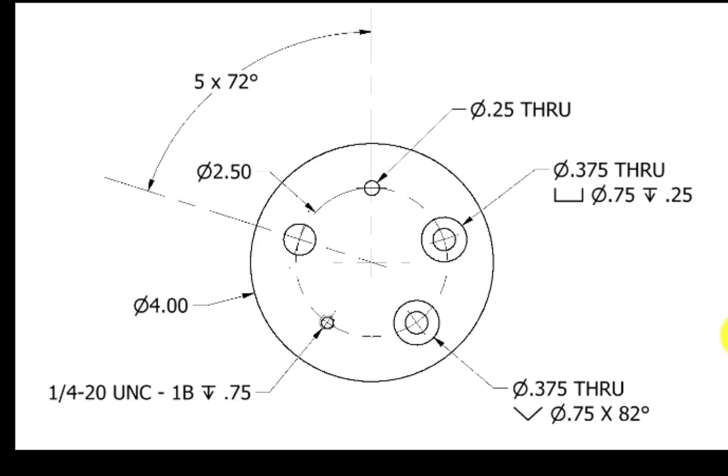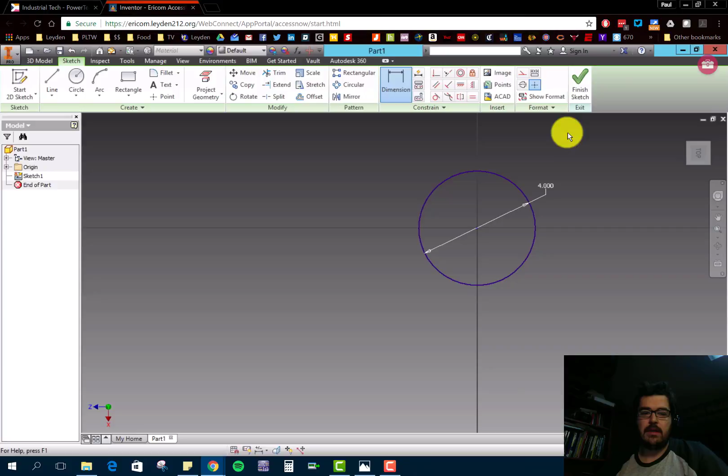So start a new part file. Starting a new part file, we'll start a sketch. Again, we're just looking to create a circle here that we can extrude out. So let's get a circle. This has a diameter of - just double check here - a diameter of 4. So we're going to type in 4 here. I'm going to hit finish sketch, but technically I hit E on my keyboard to go right into the extrude tool. And I need to extrude this a distance of 1.5. So 1.5 - oh, gotta make sure I type it in over here. 1.5.

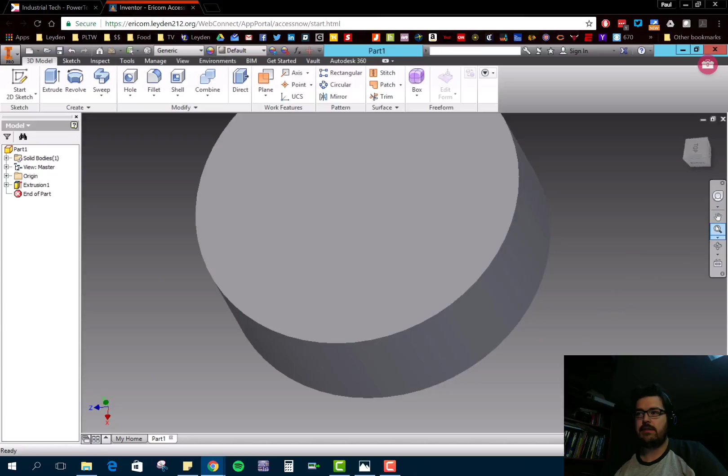All right, now that we have this in place, the instructions, if you follow along, are going to tell you to start a new sketch on this face. What we're going to do is place a point, because what we'll do later is use these points to act as the center points of putting a hole in, and we'll do that in 3D mode. So we're just placing essentially center points for these holes using the sketch, and then using a point here. So we can place points here like so.

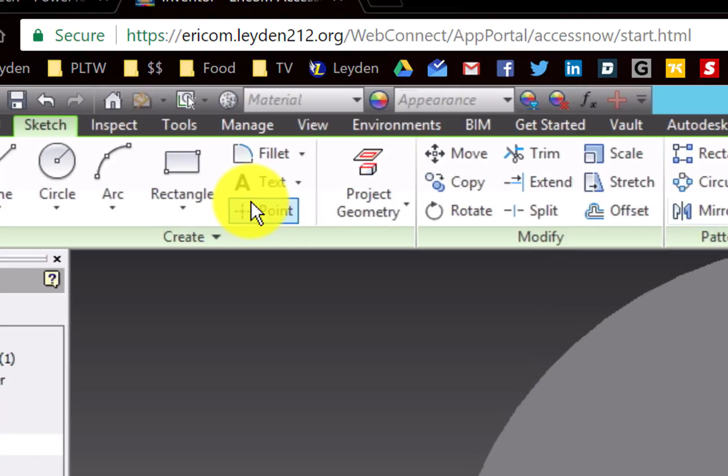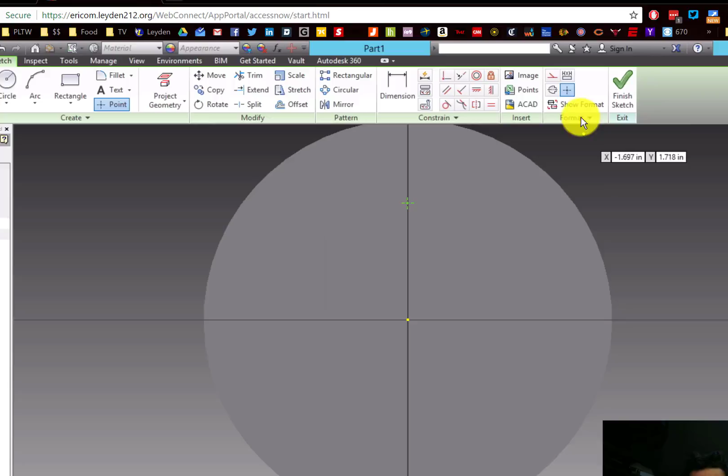Now the first thing is you want to come over here to where it says format. Before, like we changed it to a construction line, right here where it says points, we want to make sure that it's on center point. If you deselect it, it will not be on. You want to make sure it's on, so it's on center point, because if I come here and put a point down, you're going to want to see that there are those little lines with it. If I deselect this and click a spot, it's just going to put a little green dot, and that's not what we want. We want the one with the little dashes. So make sure that little box is selected.

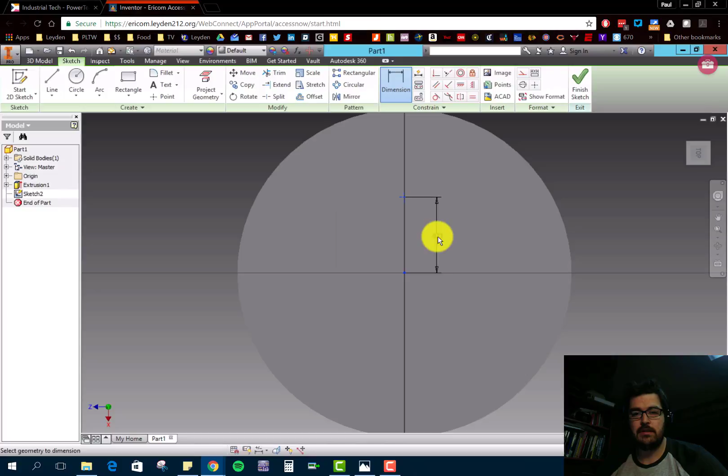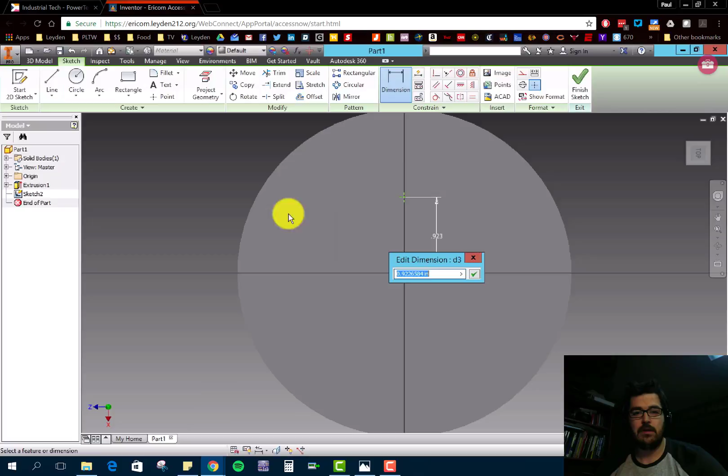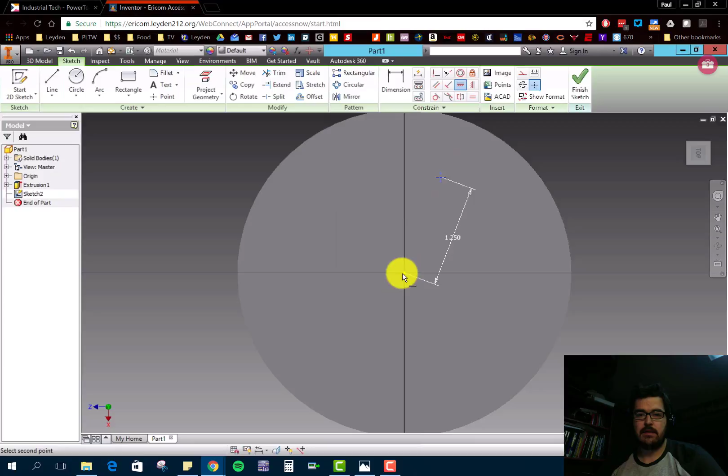Then what you're going to do is dimension it. I need to go from the center point of that point to my origin, 0, 0. That distance, if we open this up, is half of 2.5 - you see how it's on a 2.5 diameter, so we're looking for the radius here. So what's this from here to here? Well, that's half of 2.5, which is 1.25. So come here, type in 1.25, hit enter, and we're good to go. So I'm locked onto there. I could come here and drag it if I wanted to. If you placed it over here and you want to make sure it's locked onto one of these axes, use your constraint tool to then lock it into place, like so. Once it's there, it goes blue, it's fully constrained.

Once we have that dimensioned, what we're going to do now is use the circular pattern to make 5 of them, and they're all going to be equal distance from the center. So if I go to circular pattern here, still in sketch mode, the geometry I need to rotate is this, that's the point. And then the axis, I could grab either a circular edge or just the center point.

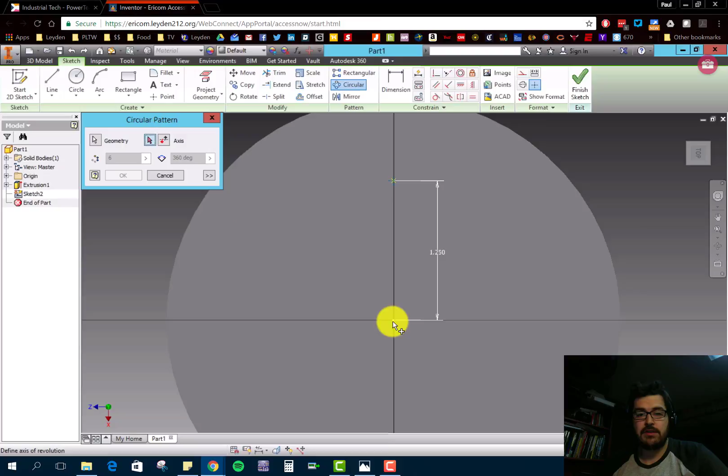So I'll grab the origin here, 0,0. And you can see that these points are aligning now. It says right now for 6, but I want to change that to 5. We'll hit OK, and now I have those 5 points on that circle there.

Now I can go ahead and finish sketch. With finish sketch selected, we can then go in and place a hole at each one of these points. In the 3D Model, you'll see here that one of the tools right here is hole.

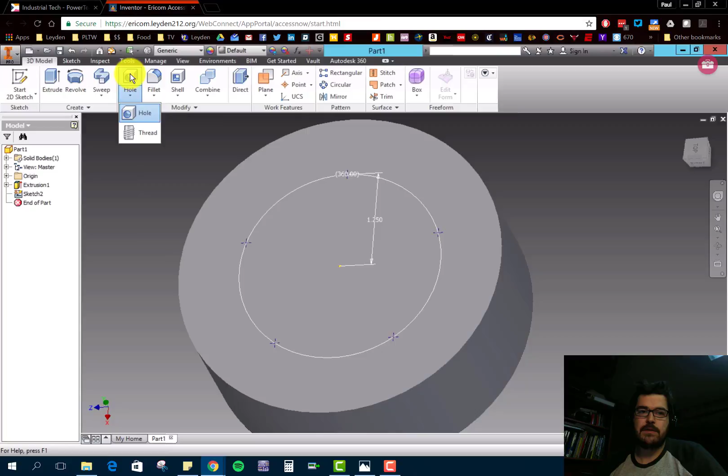If you select on hole, grab it. Notice it automatically grabbed all 5 of them. So if you don't want that to occur, hold the shift key and select any of these holes, it will deselect them. Hold shift and it will start to deselect them.

Alright, so for right now we want to just start with one of them. Looking at these holes, let's start with this guy right here. This is saying the diameter is 0.25 and it's a through hole.

So that one's easy. From the sketch, I grabbed a hole. It automatically selected that point as the center of the hole. These are where we can determine what type of hole to put in. So this first one is just a regular through hole.

The next one is a counter bore. This one is also, I believe, a counter bore. And then this is a counter sink. So it gives you different ones to work with.

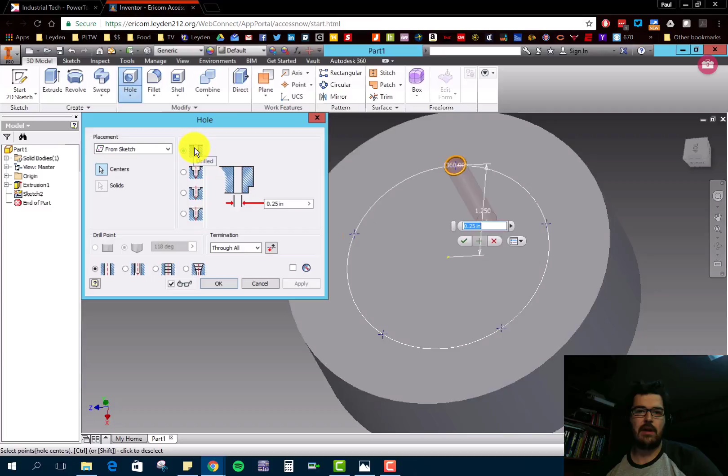But this one we just want a drilled regular hole, and this is 0.25 inches diameter. This is where we can determine how far we want to go. For right now, we want to go through all. But if we wanted to go a specific distance, we could click on this and tell it how far to drill through. So in this case, we'll go with through all and hit OK.

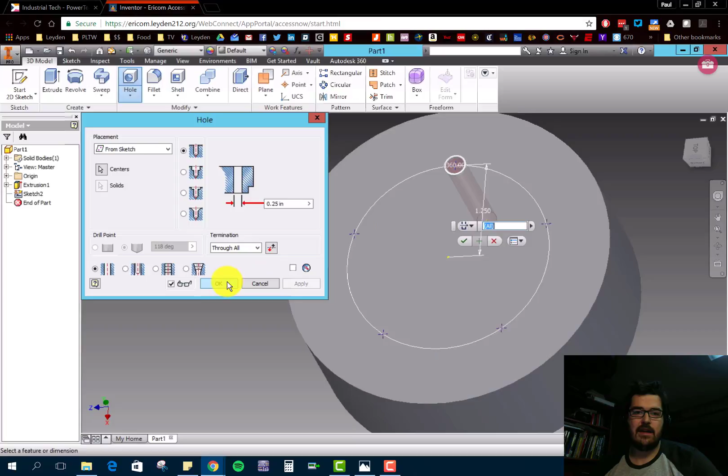Now once we put that hole in, you may notice that the sketch is now gone. So if I were to come in here and try to create another hole, the points are no longer there for me to select.

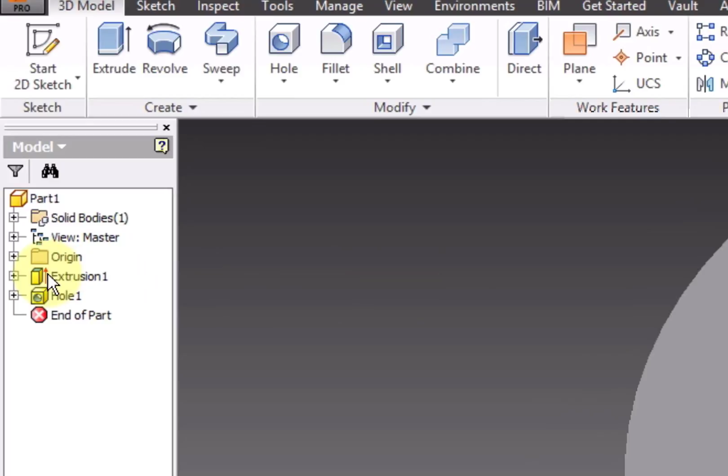So one thing you can do is what's called share a sketch. Once you do something to a sketch, it gets locked in to whatever feature you put onto it. So like the extrusion was that initial sketch of that circle diameter, and like this hole, the sketch that we worked off of was this one here.

Now, if you right click that sketch and hit share sketch, what that will do now is allow that sketch to go outside of this and be reused multiple times. So that's what we want here. If you right click that sketch, open it up, right click it and hit share sketch, it now made it visible throughout the entire part, so now we could reuse it multiple times.

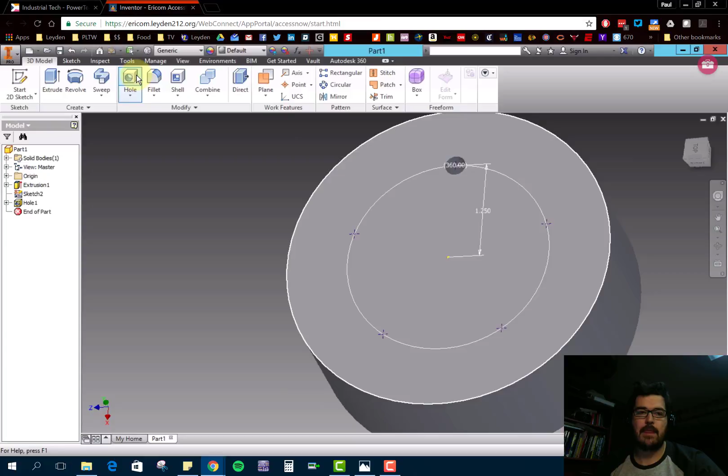So the next hole we'll do, I grab the hole command. Again, it grabbed those 4 points. I'm going to have to hold the shift key to deselect the ones I don't want, which is okay.

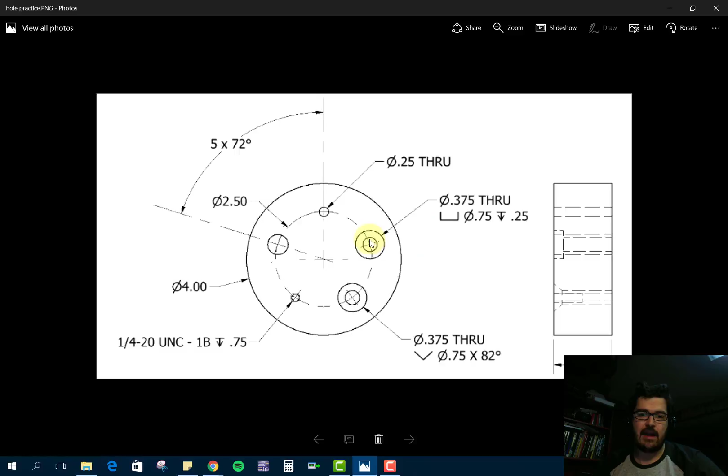All right, so this one here, the next hole we're working with, this is a counter bore, which means that there's going to be kind of 2 dimensions to it. First off, we have a 0.375 through, so that's the inner diameter. The outer diameter is 0.75, and that goes down a depth of 0.25 inches.

So let's bring it up here. What we got is a counter bore, so we're going to want to select the counter bore hole here. The outside diameter of that one was 0.75. The inside diameter was 0.375.

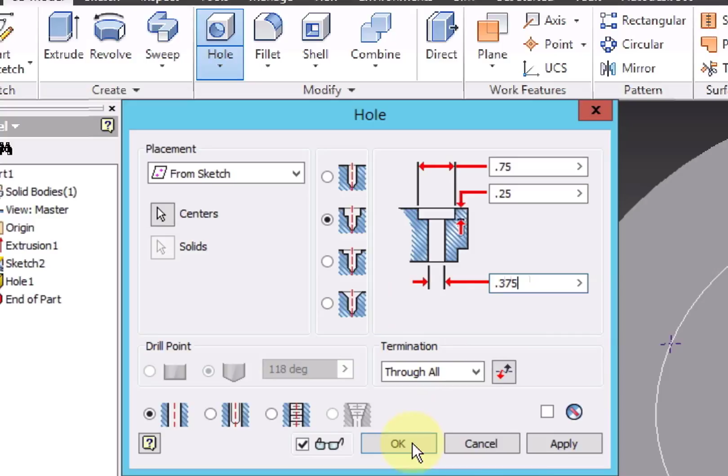The depth of that cut was 0.25, and the through hole right here is 0.375. Gotta look a little closer next time, Mr. Zurek. Nice job, but again, notice this is 0.75. The depth of that hole is 0.25, and the through hole is 0.375. We'll hit apply, and we're good to go.

Since the sketch is shared, when I hit apply it worked on that hole, and then we can move right into the next one. So this is being efficient here. I'm going to hold shift and deselect some of these, and we'll start with the next one.

The next one is a counter sink. This is 0.375 through, so same diameter distance through. But we have a counter sink cut here, an angled cut, that has an outside diameter of 0.75 and an angle of 82 degrees. So bringing it up.

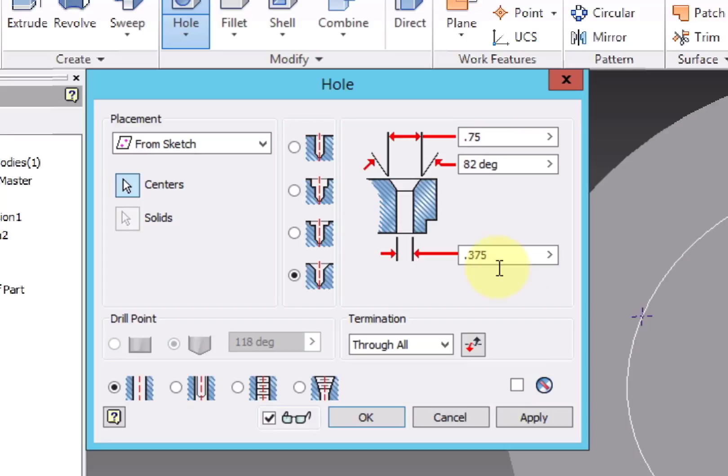This is a counter sink now, so this has an angled cut to it. Our outside diameter is 0.75. The angle, by default, 82 degrees. And then the through diameter is 0.375. Hit apply. Nice, moving along.

The next one we're looking at is a threaded hole, or what's called a tapped hole. This is going to have threading inside of it, so something you could just screw into it essentially. This is going to give us the thread information in terms of how it should be threaded, and this 0.75 is giving us how far it's going to go down the threading in this sense.

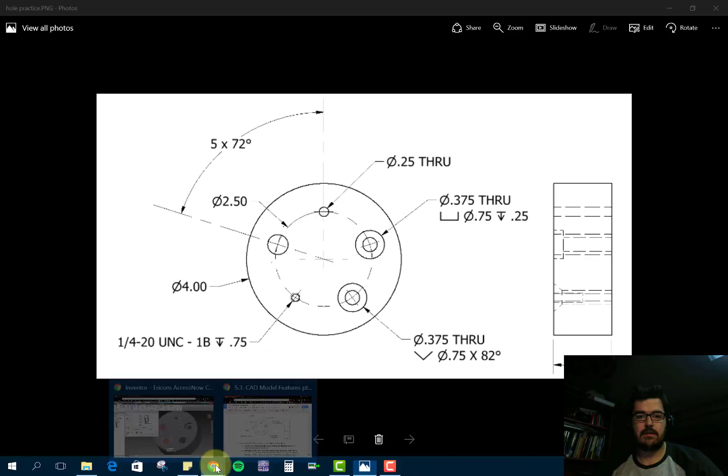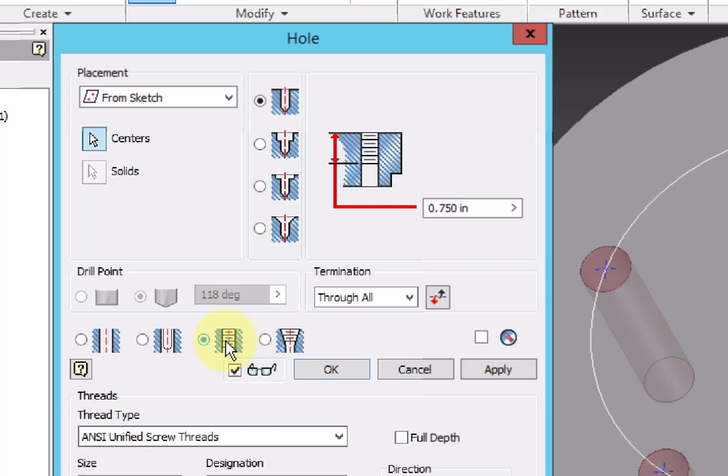Okay, let's go ahead and open this up. Our next one, since it's just got an overall diameter of a cut and it's not any countersink or counterbore, we're going to do a drilled hole. Now, down here is where we determine what kind of hole it is. This button right here is called a tapped hole, meaning they're going to thread it. So when I select on that, it's going to bring up all of the different sizes we can work with.

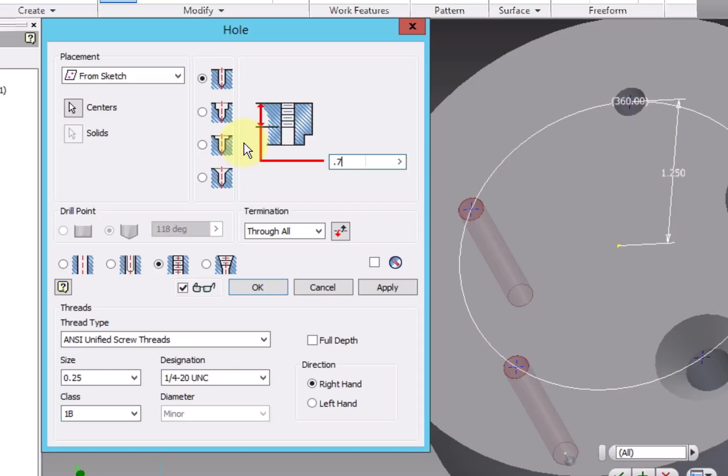So this is a 1/4 inch, so 0.25. We've got a 0.25 1/4 inch 20 UNC. This is where we could determine it, and by default it came up 20 UNC. The specific class for it is a 1B, so I can choose 1B. And in this case, like we said, the depth of the drill for this, or the tapped on it, is going to be 0.75. That's the last number there. Okay, and then I hit apply.

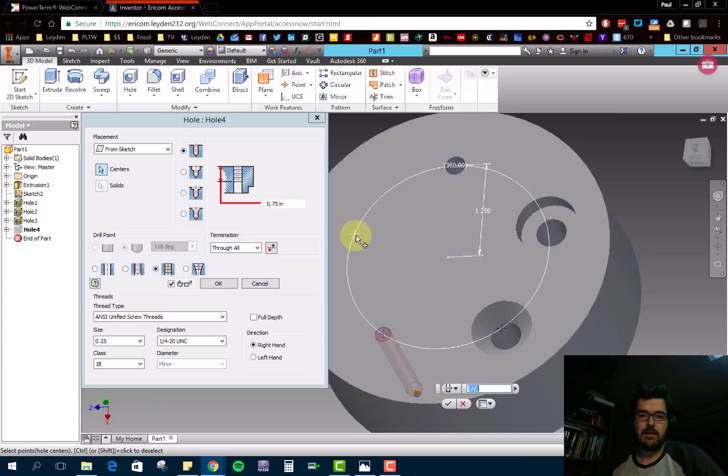Oh, now notice I made a mistake. I forgot to deselect this guy. So I'm going to hit cancel to close my hole tool. I'm going to double click the hole one that I worked on before, and then I can shift and deselect that one and go back and hit OK and clean that up. So again, you can always make re-edits to whatever tool you use.

All right, and so this last hole here they want you to work with is a clearance hole. And in the instructions, if I drag them over here, this is a clearance hole. And what this is going to allow us to do is if we wanted to throw like a bolt through it, so a bolt and a nut, we want to make sure that it's going to be snug around the bolt, but we also want to make sure that it's a little bit larger than the bolt so that we can easily put them in as we're installing whatever it is. So this is what's called a clearance hole. Here's your information for what you need to type in for this, but where you get the clearance hole is from right here.

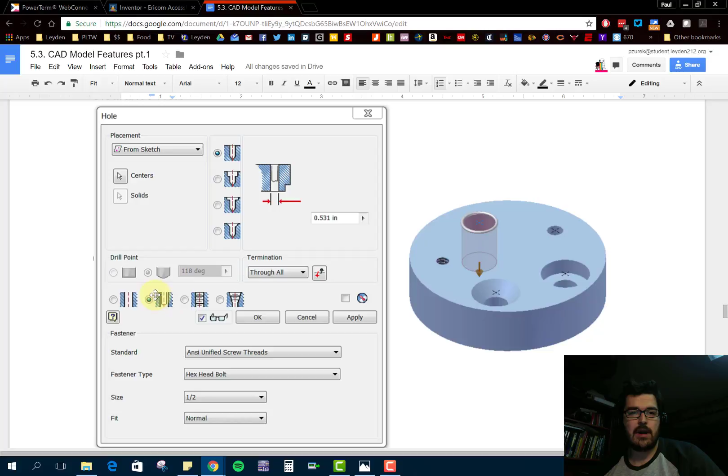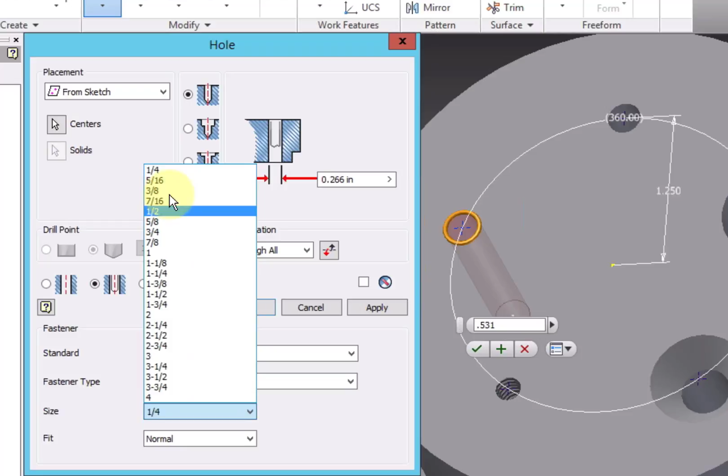To finish that clearance hole, I'm going to select the hole tool. I'd select my last point. Right here is where I can change it to a clearance hole. The diameter for this is 0.531, and type of setup here, it's a hex head bolt, and it's sized for a 1/2 inch, and it's a normal. So notice set up the 0.531 for me, and go ahead and hit the check mark, and there we go.

Now there's our clearance hole set up for a 1/2 inch bolt, just a little bit bigger than the 0.5 1/2 inch. It actually cuts a little bit bigger. So there's your part. You can go ahead and save it.